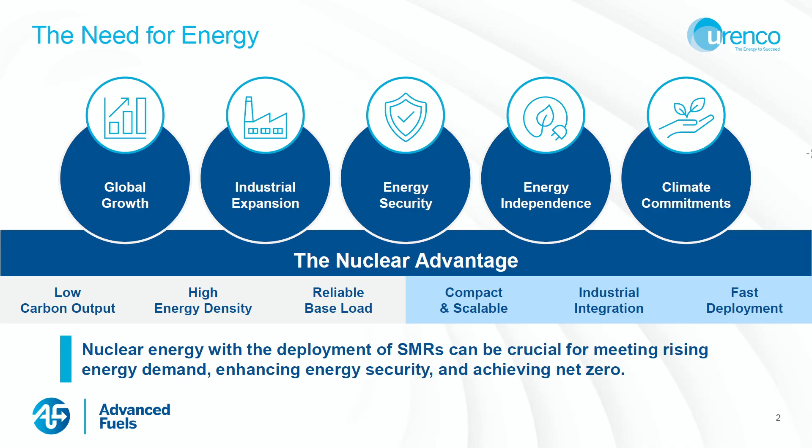In particular today, I want to focus on the potential for SMRs and AMRs to deliver on these needs. This is a quick summary of a study that will be published in two weeks, that Urenco performed together with Lucid Catalyst. The message here is that we have different scenarios, and no matter what the scenario, the range of demand from SMRs and AMRs in the next 25 years goes from 7 gigawatts to 700 gigawatts, depending on what you're looking at.

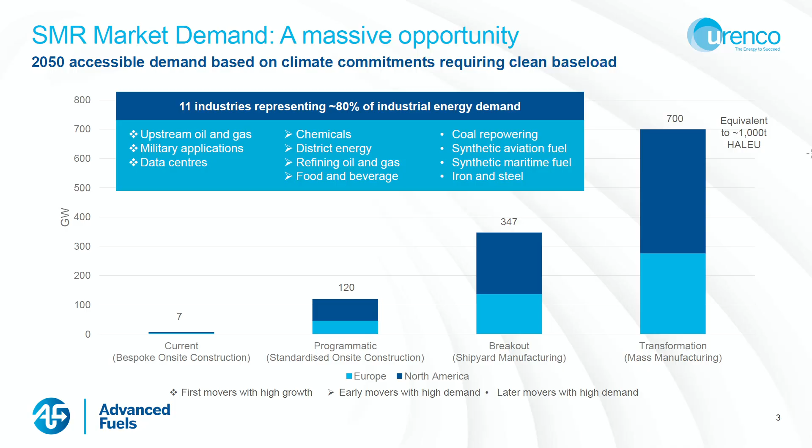But even 7 gigawatts of demand would require, for instance, Urenco to double the size of its investments in advanced fuels. So no matter what the size of the challenge, we all need to roll up our sleeves and get to work. What is Urenco doing today, then, to deliver to this market?

We operate 4 enrichment sites in 4 jurisdictions: the US, the Netherlands, Germany, and the United Kingdom. Our capacity today can deliver enough enrichment services for about 130 to 150 nuclear reactors worldwide. And we're investing actively in advanced fuels.

As of today, our business is enrichment services up to 5%. By the end of the year, we'll do first delivery of enrichment services up to 10% out of our site in the US. Our site in the UK will start LEU Plus deliveries potentially from next year. And we're getting ready for HALEU.

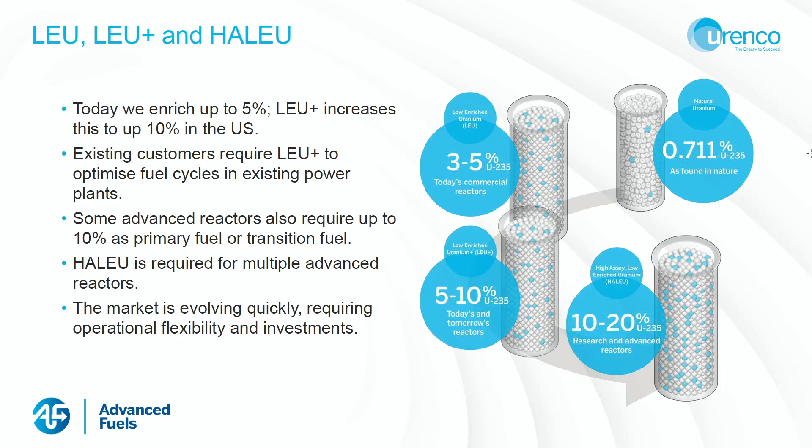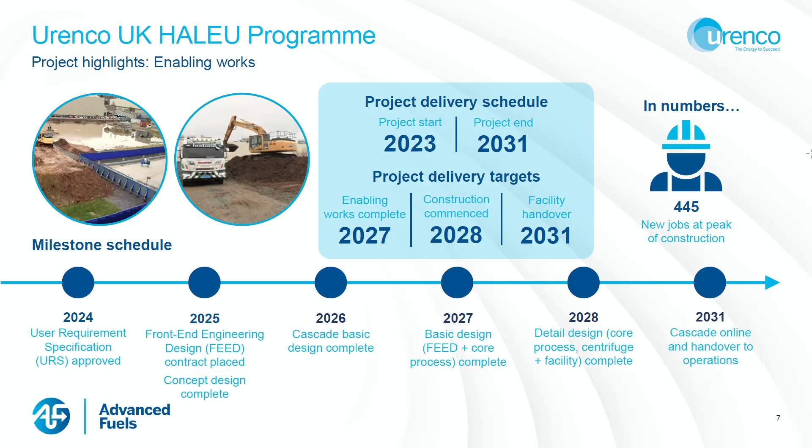We have an investment in the UK for a HALEU plant that is being built today, that will be online in 2031, with a nominal capacity that can be up to 27 metric tons per year, and it's expandable. And it's happening - this is reinvestment, 50% from Urenco, 50% from the UK government, to address the chicken and egg problem. And then more near term, as I said, LEU Plus.

The NRC issued an operational license for us at the end of September, and we're now getting ready to make first production at our site in New Mexico.

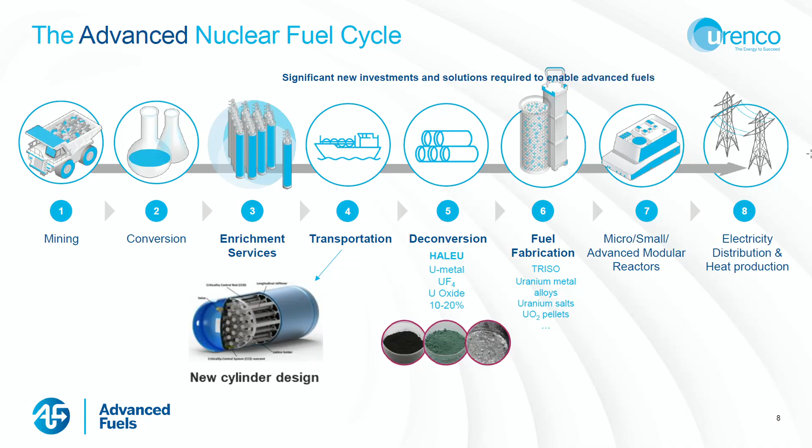There are still some challenges in the advanced nuclear fuel cycle. This is what we see today. For the normal fuel cycle, for HALEU and advanced fuels, we still need to address questions about logistics, deconversion, and fabrication at commercial scale. For this, we're working together with our partners, with our customers, to address the issues and solve them together.

So very quickly then, I'll mention a couple of highlights to introduce Radiant and Jimmy Energy, with whom we signed, with Radiant, the first HALEU commercial agreement. And with Jimmy, we signed last year an LEU Plus agreement to accelerate their deployment of their technology in France.

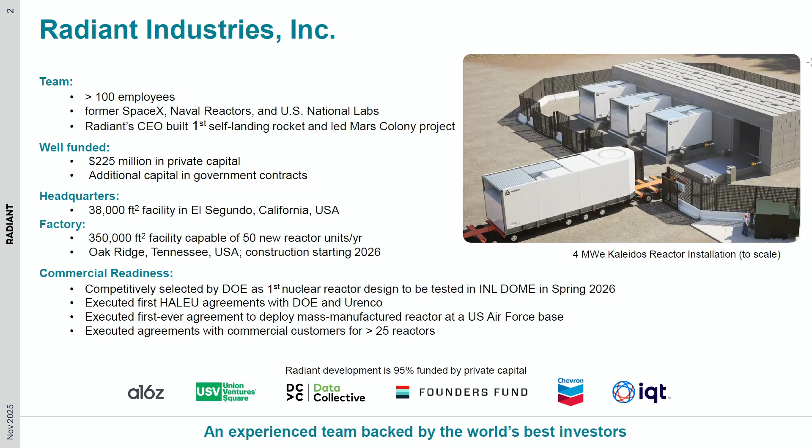You'll see at the bottom some of our funders. We're very, very grateful for their support.

So this is kind of an overview of 4 of our reactors. We are aiming for rapid deployment, I'll get more into that in a moment. It is scalable, so you can have 1, you can have 2, you can have 4. It is going to be mass produced, so in that factory in Oak Ridge, Tennessee in the United States, we will be producing 50 reactors a year at the height of production.

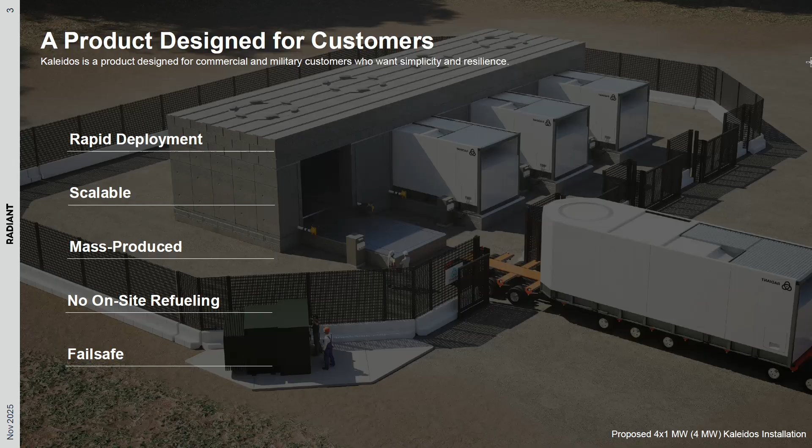So I like to call this megawatt in a box. It can be shipped to you on a flatbed truck, by rail, or frankly by aircraft. We're getting the weight down so it can actually be transported on a C-17. It takes less than 2 days to install - it actually takes 1, but I want to be conservative here. It's built in Oak Ridge, Tennessee, and then deployed anywhere around the world.

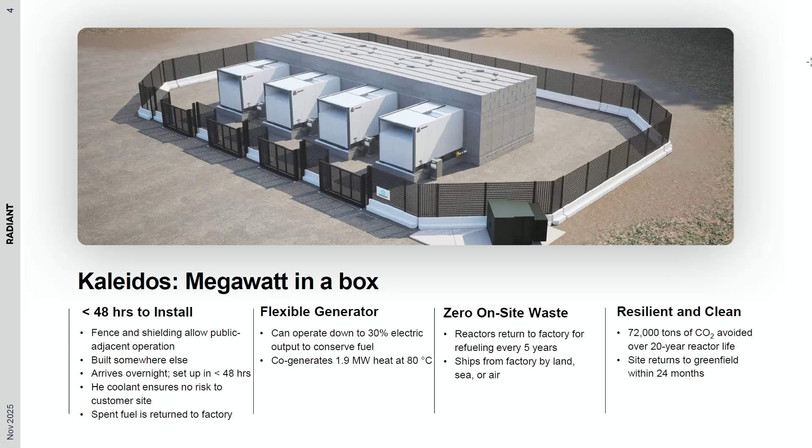Zero on-site waste. You tell us where you would like it deployed, we help with the permitting. There's very minimal land prep, there's no excavation, there's no construction required. And then it ships from the factory by land, sea, or air. It's nuclear, so it has all of the great facets of nuclear: clean, reliable, abundant, resilient.

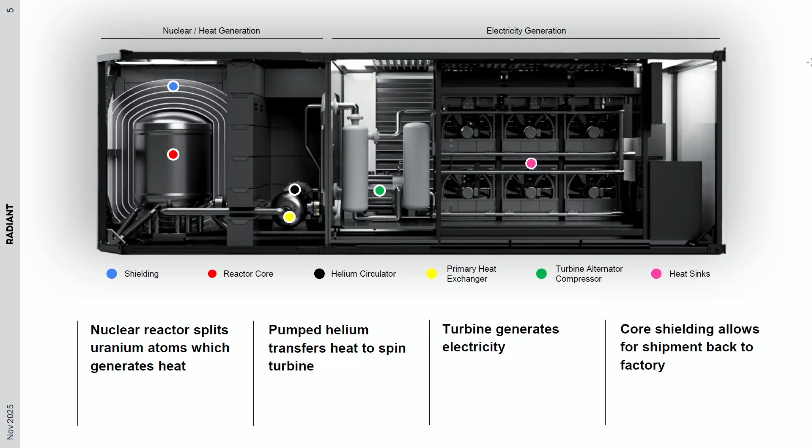So this is a cartoon cutaway of what is inside that box. It's a traditional high temperature gas reactor. We are using TRISO fuel. Thanks to Urenco, we will be able to have HALEU in that TRISO product.

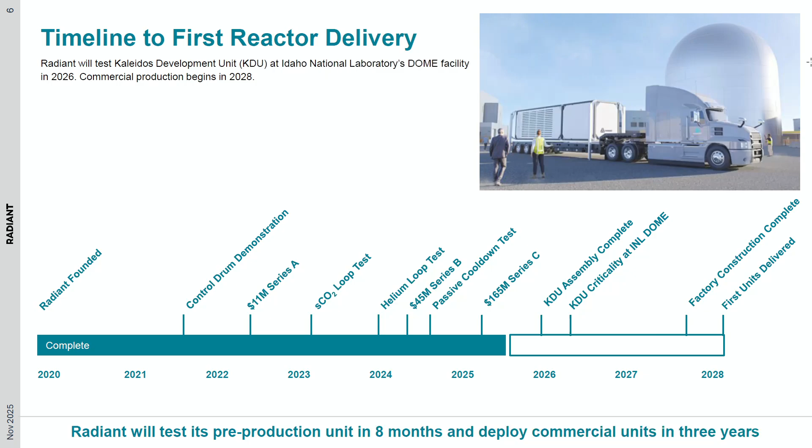It might look familiar to some of you that are history buffs. That's the EBR-2 reactor that's been refurbished. And here's what it's going to look like when we put our test inside the dome. It will be a one-for-one replica of the reactors that we are commercializing, except for generating electricity.

So everyone got a picture of that who wanted one? Okay, because I'm gonna change slides in a second. The heat rejection system is outside of the dome only because of space constraints.

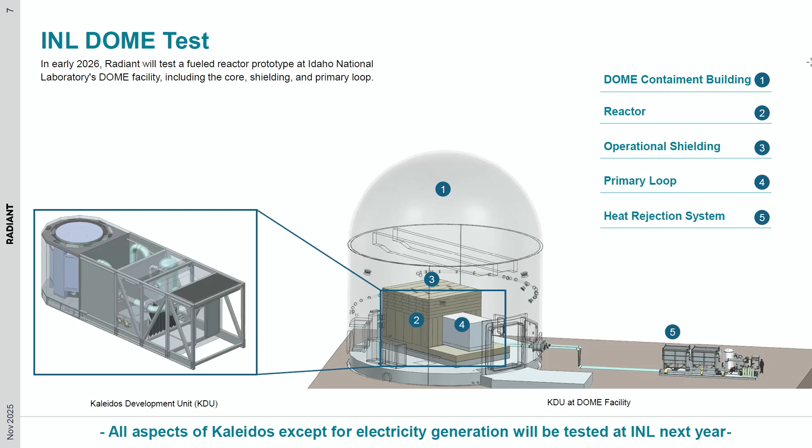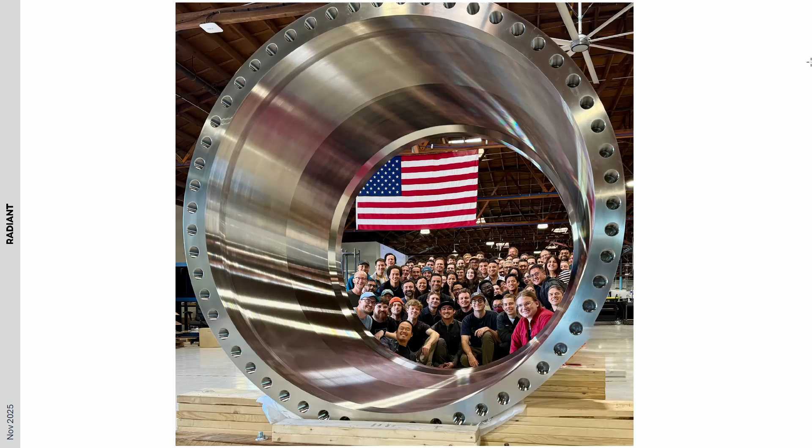This is our pride and joy. This is our reactor pressure vessel barrel that just arrived a couple weeks ago in-house at our facility in California. And you'll see a few shining faces in this picture that are in the back row over there as well. If you have questions, you can talk to some of our supply chain leaders.

And then once the test is complete, we will ship it out to Idaho National Lab to support the dome test that we are running. The team that you see here is part of the design review team that reviewed our design last week at our headquarters. And we intend to submit our preliminary safety design assessment to the regulator next week.

So really working very quickly. It's a bit different than what I call the old stodgy nuclear industry is used to. I am grateful that things are changing in terms of pace, and we're moving with a sense of urgency. Thank you very much. Look forward to your questions, and I will close with Radiant: we are obsessed builders that will deliver the world's first mass-produced reactor. Thank you.

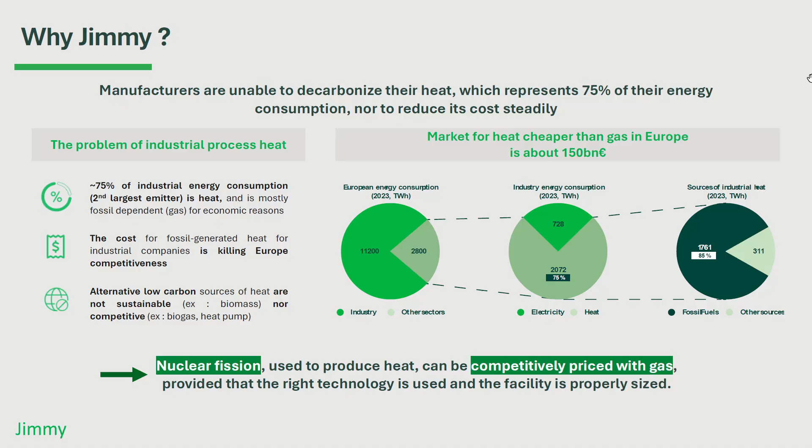Because when you look at the clients, when you talk with the industry, what they say is that, okay, I can use something that is decarbonized, but it's always way more expensive than the fossil fuels that I use. So the goal that we have is to say, okay, let's take the nuclear energy that we know how to make and make it something that is profitable in order to give to the clients something he wants. That means an energy that is decarbonized and at a cheap price.

So that's what we did. We have worked for the past 4 years, 3 years, in order to design a reactor that does supply this kind of steam. And in fact, it's something that we know the cost because today we are at the edge of industrialization and we know all the cost of the device. We arrive at something that is an HTGR, a high temperature reactor.

I will talk about it just later. And that is around 60 megawatts. It's a good power in order to have something that is profitable, but also small enough in order to go to the industrial sites.

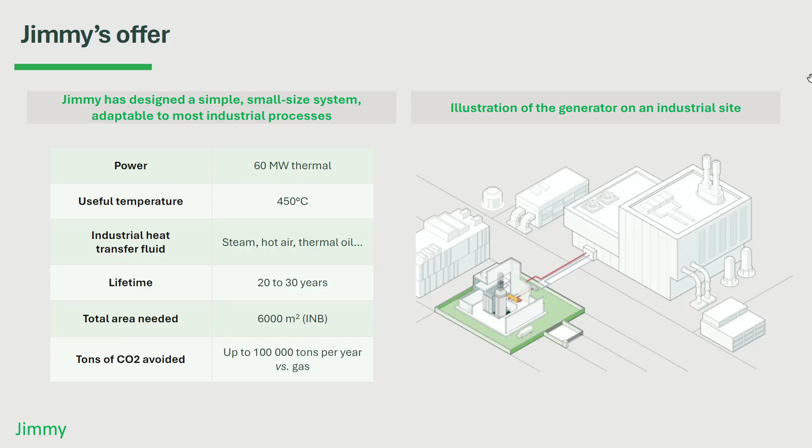It is something that is quite small, 100 meters by 60 meters, so you can fit a lot of them in this kind of place. It's not a container, it's too hard to do a container, I'm sorry, but it's too hard. So we do something that is more a building, but in which you have a 60 megawatt power that provides steam that is decarbonized and cheap.

In fact, it's not something that we have invented, it's something that the clients want. So we have sold the first clients, that is Cristal Union in France. We are under licensing by the safety authority, and we have submitted the construction permit. That means we are really into the complicated stuff about how the graphite behaves, how the nuclear fuel behaves, what happens if somebody comes with a truck full of explosives somewhere, this kind of stuff. And it's going quite well, so we're happy for that.

And like you see, it's not very big, it's just here, really small on the site. So even if it's a building, you still have something that is quite small for an industrial site. So everything is quite fine.

In fact, that means that if I'm a bit arrogant, I would say that we are the first SMR in Europe. We have the first one under licensing. We have clients, we know where we are, we have contracts, and today it's going quite well. We are under the support of the French government, which has also continued this support this year. And if I have to say, we are the first private company to get the operator status as a nuclear operator in France. So for now, it's just a status. The goal is to make a nuclear reactor that starts.

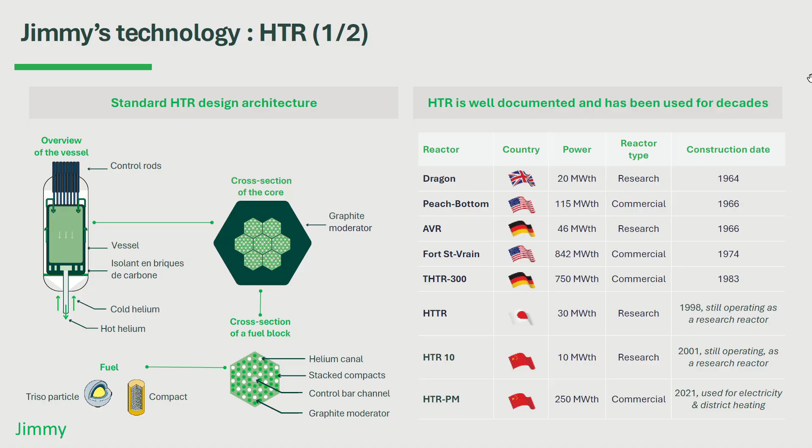If you look at it, what we did is a small reactor. This is an HTGR, but we decreased the temperature a bit in order to get materials that are easy to obtain. Also, instead of having a steam generator, since we put the steam directly into the industrial process, we have a buffer loop that is based on CO2. So the goal is really to do something that is industrially proven, and in fact we have the cost and every supplier for our system.

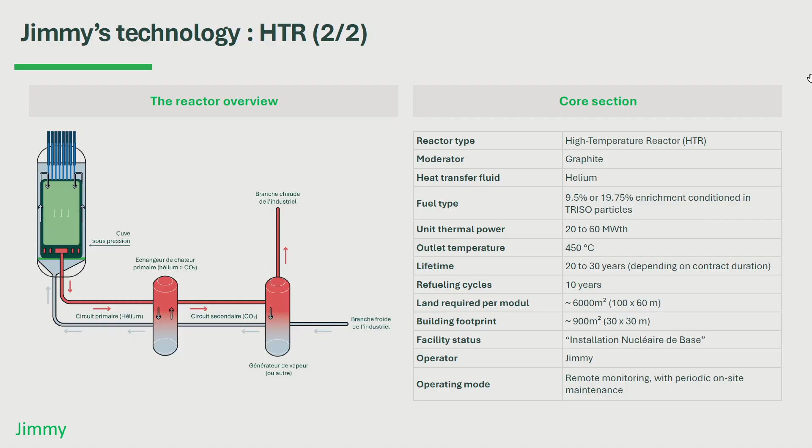And now, including Urenco, because I have to, Urenco was a great partner and I have to promote them. But the thing is, we know where we are. In a way, we really have a connection everywhere in the world, based on HTGR. And I want to thank Urenco, because thanks to them we have the uranium for the first core. Since we don't have the time to wait until 2031 for the HALEU, we started with 10% enrichment, but we count on them for the HALEU after, because everything is better with HALEU in your life.

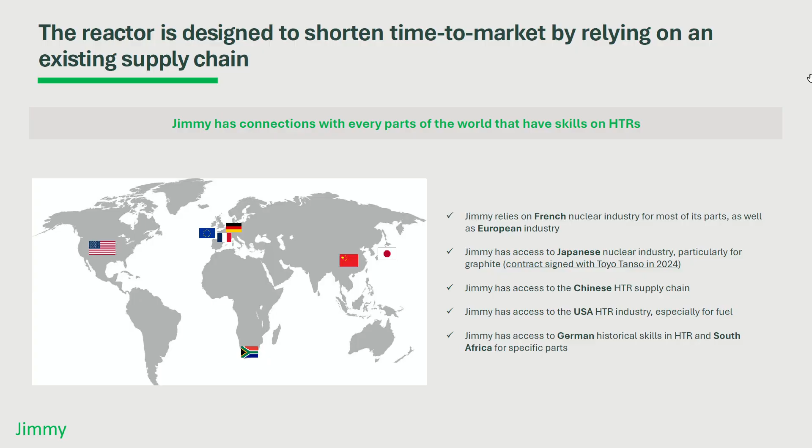Is it the last one? I think it's the last slide. So, you see. Thank you.